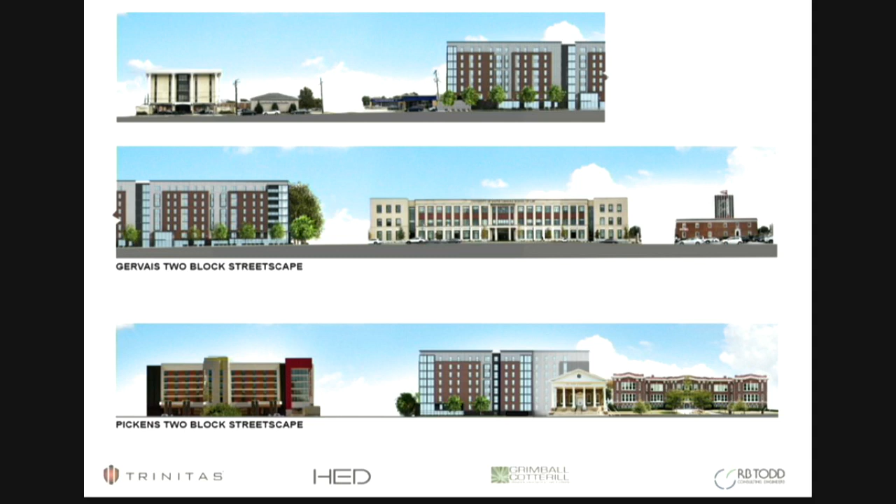This is one image of our building looking from the university towards Gervais from that south side. One of the things we're trying to do is, as we actually wrap the corner of the building, we're wanting to pull the brick around and create focal points on those end pieces, sort of bookends of the building, trying to bring that better materiality to the brick around the corners.

Here is an image looking from the U Hill neighborhood, once again really mirroring the other side of the building that we just saw, wrapping that brick around the corner, trying to find some focal elements that define those edges.

Here, I think one of the things to note, especially with the north elevation, which is the main Gervais elevation, is that we've really been trying to think meaningfully about the ground level and how it really engages the community, so something that's vibrant and glassy and has more of an urban type feel at the ground level. But then above that, we switch to the brick.

In the brick, we have two different brick variations: one which is essentially a brown variation, closer to the University Inn down the road, in that sort of range, and then contrasting that with a slightly darker brick at key elements like the entry and the corners and other elements that are recessed on the building, especially at the ground level, trying to make some of those areas a little more rich as they engage with the pedestrian public.

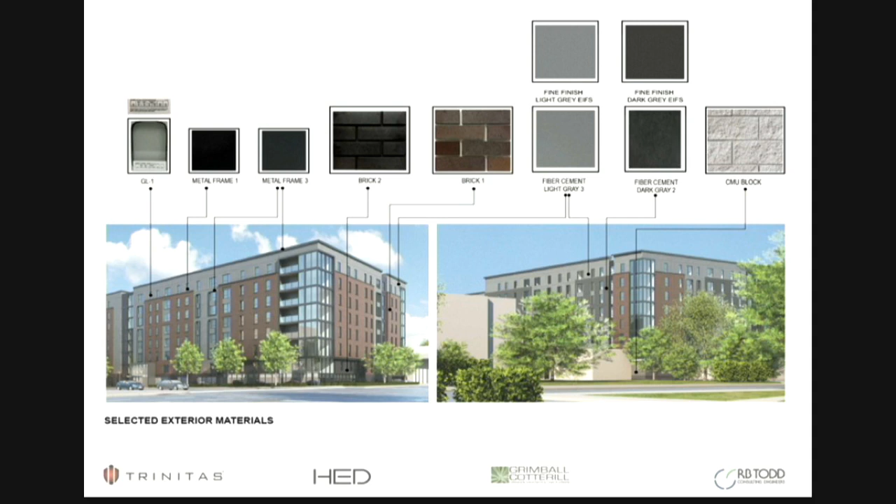As I commented earlier, this is the original submission. We've already received some additional comments from the design committee and a couple more thoughts. In this original one, the brick was actually further down on the facade, and that capital band at the top was a little bit larger. Now we've looked at potentially extending that up, and we think that does some nice things.

Another variation is bringing that brick potentially across the openings where we currently have the fiber cement, framing those and making the expanse of brick feel like it's going across the entire facade. So you can see some of these changes based on the commentary we've already received from the city. We agree with the commentary, and we're working with the city, and we think some of these will help the project. And that's it, thank you.

I guess this is where we ask you for your comments, your feedback, and any questions you might have. I still may have to defer to my experts on various pieces of your feedback, but...

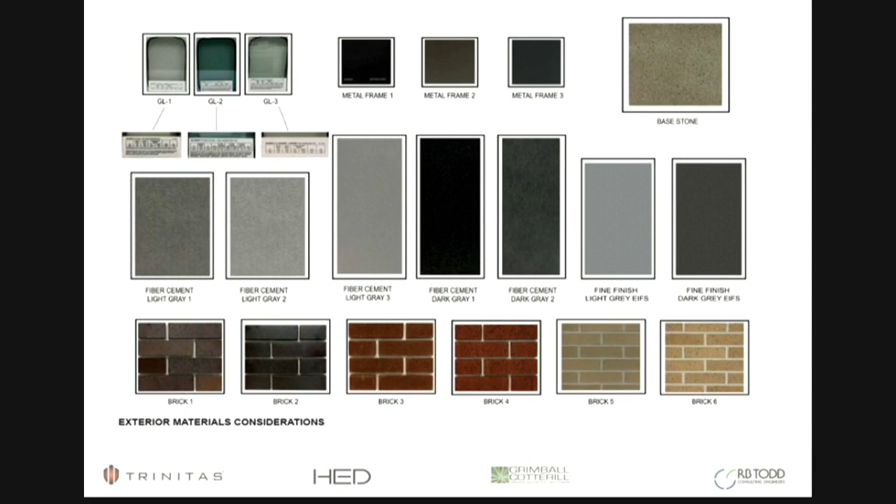I have a question. On the east elevation facing USC, I need to see that. The east elevation is coming from the university going up Pickens — well, there's a church next door. So the east elevation is actually the car care side of our building.

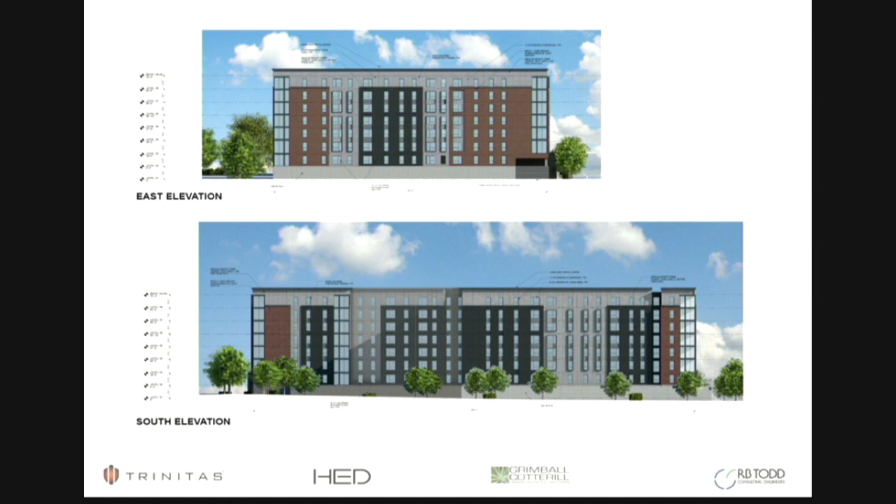Are there any options like you did before on the east elevation? What he demonstrated in those last two slides is what we are going to carry forward. He just took a stab at the north elevation to address the feedback we got from the planning department. We will further develop the other elevations based on that feedback. There were two scenarios presented — this was option 1, and this is option 2.

And that continues to the rear elevation? That continues as a recommendation to any location in which we have the brick. I think we'll find a way to make sure that mass and that rhythm makes sense.

We're showing 9'4" floor to floor on the residential spaces, and 10 feet on the ground floor. That's to be able to fit within our 75-foot height clearance. In order to do that, we had to sink our corner at Pickens and Gervais 3 feet 4 inches to stay within the height limit. That has a lot to do with why we moved the entrance to the middle of the block, because at the corner of Gervais and Pickens, you'll be walking on the sidewalk and looking kind of across and down into our space.

When you get closer to our entrance, we're flush with grade. And then from a mechanical standpoint, as far as rooftop units and screening, I know we have a comment. Can you speak to that a little bit?

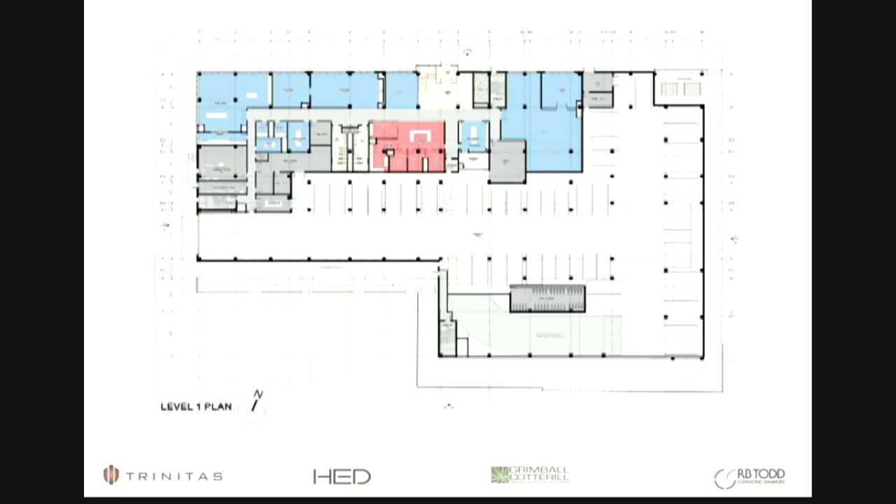Absolutely. We have a section which I should have mentioned. On the very top, we understand that the parapet height is not included in the 75-foot height calculation. So in order to fit our rooftop units, they're estimated to be at 3 foot 10 inches. We're showing a 4 foot parapet, so we should not be able to see them from ground plane or as you approach it.

Is the elevator going to the roof? No. So you're going to have a penthouse and it still falls within 75 feet? Absolutely. We will have a penthouse for the elevator.

This will be a machine roomless elevator, so we estimated—it's not shown in this section—but we do estimate that the penthouse should be about 6 feet over the roof line, which puts it at 15 foot 4 inches above the last floor it serves. And we understand that the elevator penthouse is not included in the height calculation at all.

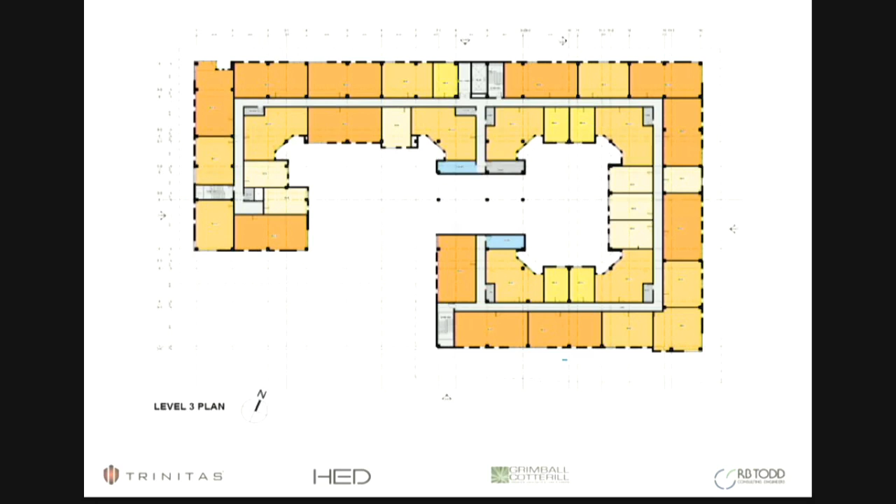How about against? Step forward. Have you signed in? I have, yes. Okay. But I have not been sworn because I was signing in when the swearing took place.

So, someone was swearing in. You affirm to tell the truth? I do. Thank you. Okay, carry on.

Thank you. Members of the DDRC, my name is Tom Gottschall. I'm the president of the University Hill Neighborhood Association. I live at 1824 Senate Street, which is approximately 2.5 blocks down Senate Street from this project.

Representatives from the University Hill neighborhood, from Historic Columbia Foundation, and also from the University of South Carolina are here and jointly oppose this project, and will speak about that opposition. The primary opposition that we have to this project's proposal is its mass and design, and the consequences that flow from that mass and design.

I listened to the presentation. One thing they don't mention is students. Trinitas deals in student residences, and this is to be rented by the bed. The 271 units have 540 beds. It's to be rented by the bed to students.

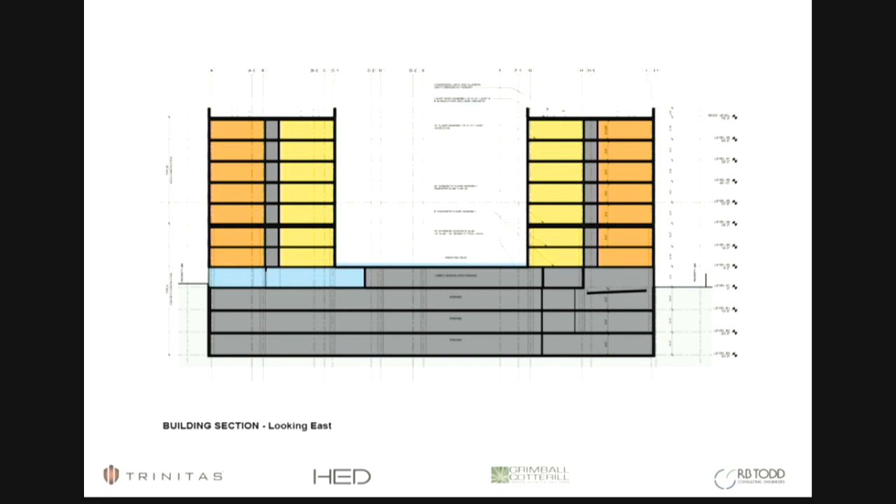Anybody like to make a motion?

Also, just to remind you, there's two motions we need to make: one for site plan and one for the design approval. We're going to do the new construction motion, correct? Are we going to do both of them for one motion? Separate, two separate motions.

Anybody would like to make a motion? I've got a couple other questions, for the developer. I just want to come back before we get to a motion.

I commend the effort. I think you guys have done a good job working with staff. I'm sympathetic to the pedestrian and student concerns. I know our purview is kind of in the guidelines, and while I like the finishes, I'm just really struggling with the massing. It seems like we've had some projects come in that are kind of dancing on the fringes of the guidelines, and maybe not really taking into account the full fabric of the areas they're going into. If there was a way to either make this smaller, I think there would be a better way to get there where this is not so imposing on the neighborhood and the surrounding area.

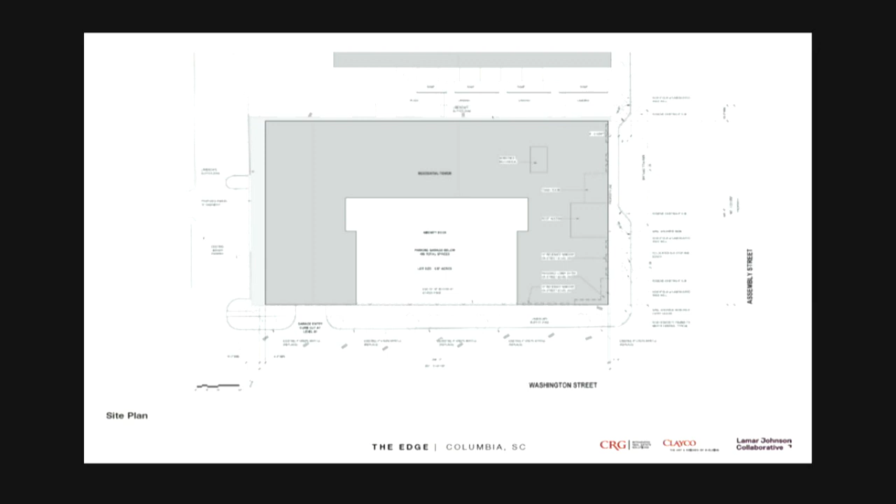Any questions? Go ahead. No, you go ahead, Harry. So, when this came, and this is just a curiosity question, but what led to the departure from the fenestration from the 2015 submittal? Yeah, what led us to resubmit the design? Well, I like the project. I remember the first one and was just curious.

I think, I'm just looking at some of the fenestration and... Sure, I think I can at least bridge the context from 4 years ago. So it was really driven just by the pro forma of the building and just sort of what the market was asking for this type of project.

So at that time, we were very light on parking. We just had the 2 floors. And that proved to be a bit of a handicap in terms of getting support for the project just from the marketplace. So when we revisited the project, we tried to address that by adding the parking levels, and in spirit above the 5th level, from level 6 and up, we really kept the same character.

I know we worked with the panel, with the committee, multiple times over months to get to a solution that I think everyone felt comfortable with aesthetically. So we really tried to honor that. And then when we added the parking podium, it changed the mass at the street level.

And so right now we have the garage, we have that service access for trash. That was still there, it was just into a garage. So I think some of the pieces that have come up now are more development items, because as Andy had said, we hadn't talked to SCDOT at the time, and so some of those comments may have come up, but we're just being a little more proactive now in trying to resolve all those issues.

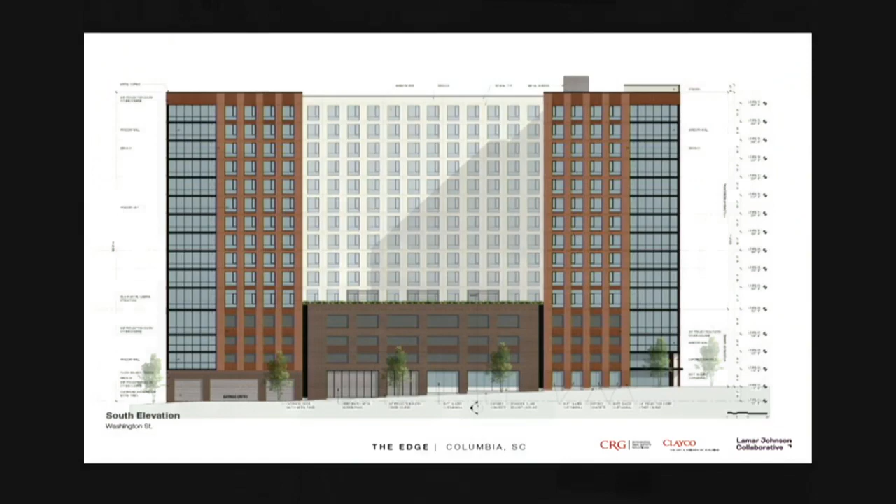Any more comments, questions? Just have a question, if you wouldn't mind addressing the city center guidelines, which state that projects should be sympathetic and compatible with surrounding buildings in terms of mass, scale, height, and in 5.3, building mass and organization, the height and scale of new buildings within the city center should complement existing structures. Could you speak to that? It's a very tall building, so if you could just talk a little bit about that.

Yeah, sure. So unfortunately, we don't have a site aerial. Yeah, like a site aerial to show the context. Maybe, do we have one that's further out?

Well, unfortunately, we can't show this context directly, but we've really considered this building as part of the city center. We're looking for higher density, walkable type neighborhoods. Assembly is a higher traffic, higher density street, both towards Main Street and towards the university, and that's how we've conceived this structure within that context.

You're right, it's a vertical building, but from a total height perspective, yes, taller than the library, but not necessarily taller than buildings within a 3 or 4 block radius towards Main Street. We'd have to follow up with something showing that context.

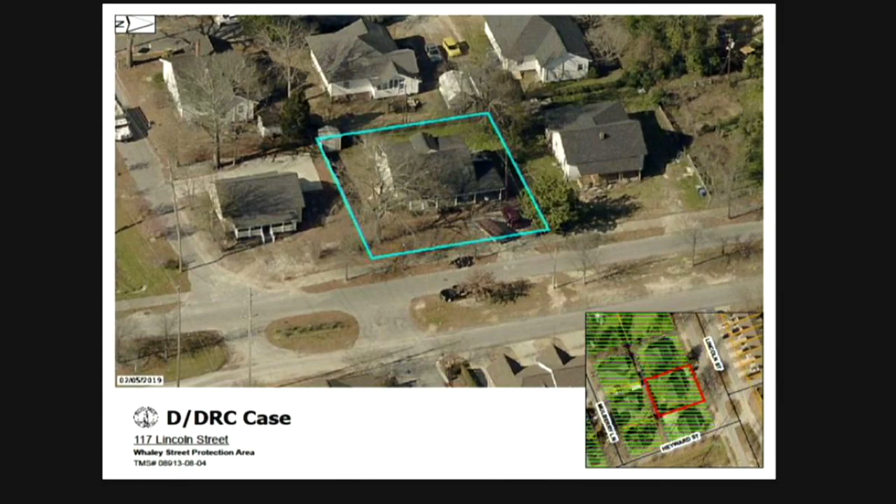My question is, do you have any new evidence to show us? Yeah, the evidence is you can't park on the street, as the parking individuals told us.

My issue is, as they'll say, you could have brought that up in the first meeting. What I'll say is it's a mutual mistake of fact, as Section 8 allows, to get a rehearing, and the fact that they even represented to the commission that you could park on the street out there at the last hearing.

So I would think you would admit that's a mutual mistake of fact. If we all thought, even the commission thought, we could park on that street, it clears up, I think, the main reason why I was denied the variance. You can park on the street. There are also options for you to park on the property though.

Yes? Was that not discussed as well previously? It was discussed, and it was, if you have 3 cars, you can only park 2 within the ordinance, what the ordinance says. So I think I expanded the driveway when we basically bought the house. If we go back to that last hearing, I called the permit division to ask, do I need a permit?